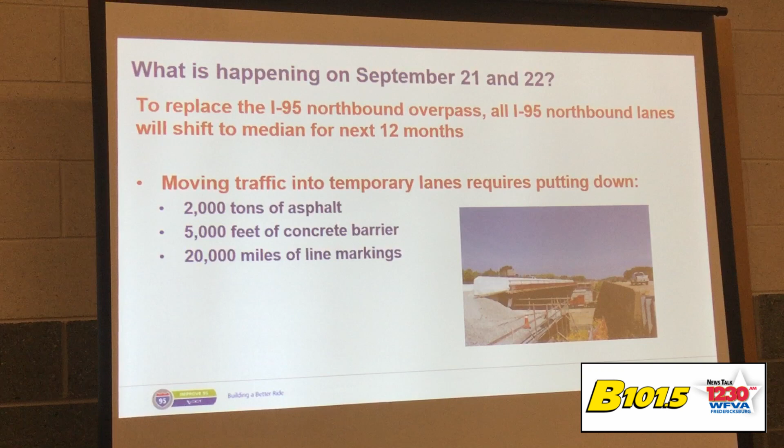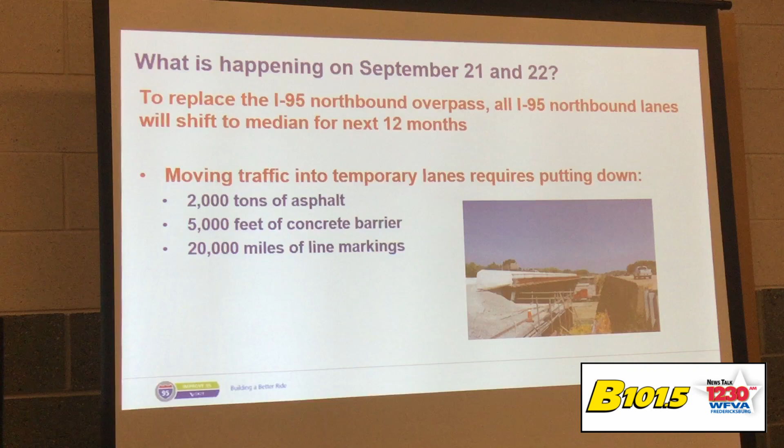So this weekend we are shifting traffic over to the new alignment. The northbound traffic on the general purpose lanes will be shifted over to the new southbound general purpose lanes bridge that we've just finished construction of. That shift is going to last for about 12 months, and it will be a full speed shift. That means we'll be diverting all 3 lanes over to the new alignment and maintaining interstate speed, which means we have a substantial amount of pavement to add. Traffic should flow through at free flow and not notice the shift. So it should be business as usual in Fredericksburg after the shift.

Essentially, we had to pick this work window over the weekend. This project, this particular shift, could have been dragged out over a month of nighttime work trying to expand these lanes. That would have required substantial asphalt work and intermittent lane closures that overall would have had an increased cumulative effect on traffic. So instead we tried to condense that into an 18-hour window with the least overall cumulative impact on traffic. We will have major impacts Saturday night and potentially early Sunday morning, but hopefully that will be short-lived and we'll be back to business as usual Sunday afternoon.

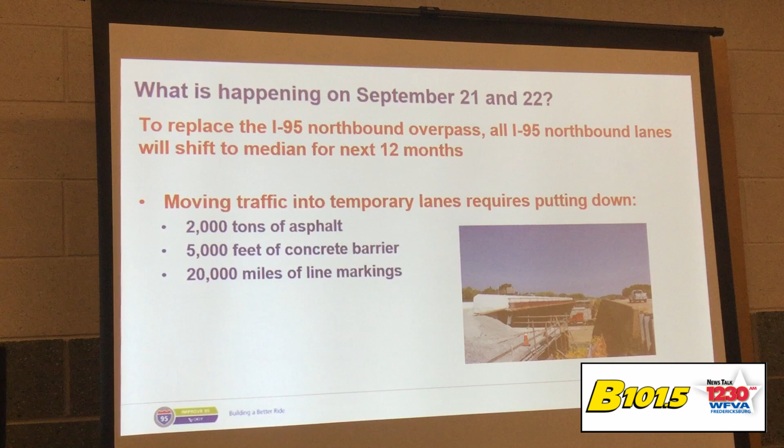All of that decision-making was driven by data, looking at traffic forecasting and modeling. We've done several models and simulations to come up with what our traffic delays should look like in the corridor, and come up with guidelines about how to handle deviations from those models as we go.

To emphasize the point, this is a profile view alongside the new alignment. You can see there's a substantial amount of asphalt. To build this shift at speed, at certain points we'll have to add almost 1.5 feet of asphalt to the existing I-95 profile.

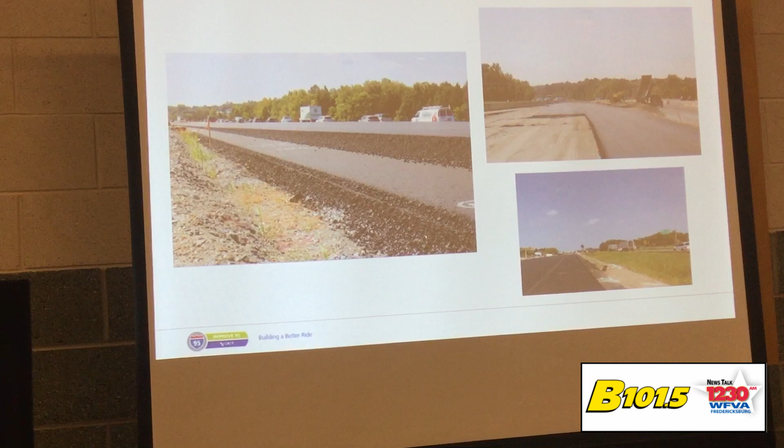That's why we have to do this closure of the through lanes and the diversion over to the exit road. Without that, we'd have to build each lane slowly, piece by piece, night by night — 2 inches, 2 inches, 2 inches, stacking that up. I joked about bringing blocks to stack up, but it would be painful, and on top of that it would pose a greater safety risk as motorcycles and other specialty vehicles faced uneven pavement for as long as a month during that buildup. Not to mention we'd almost triple to quadruple the amount of asphalt needed for that temporary condition just to maintain traffic on the corridor.

So in the end, this was a data-driven, smart decision for the Commonwealth to make sure we could extract as little pain as possible in doing this overall shift.

So hour by hour, what you can expect: at 4 p.m. we will be dropping a single lane closed — the left lane towards the median will close at 4 p.m. We don't expect substantial backups beyond what we normally see in Fredericksburg at that time.

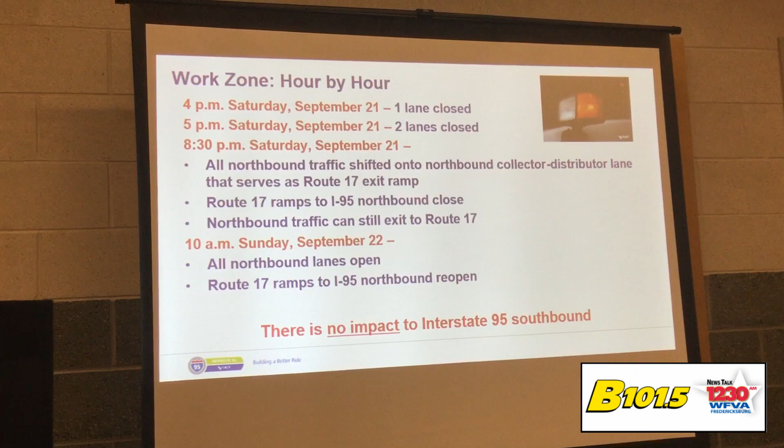At 5 p.m., things will get a little more complex as 2 lanes will be closed. When those 2 lanes are closed, we will open the exit road, what we call the collector-distributor road, at 133. Traffic will be split through on both roads, so we'll still have 2 lanes open at that point, diverting some of the through traffic over to the CD lanes. You'll want to pay attention to the split — that will be the most complex point for drivers, and they'll need to understand that if they take the exit road, they will still be on I-95 North and will still be going through. You will not have to take the exit road.

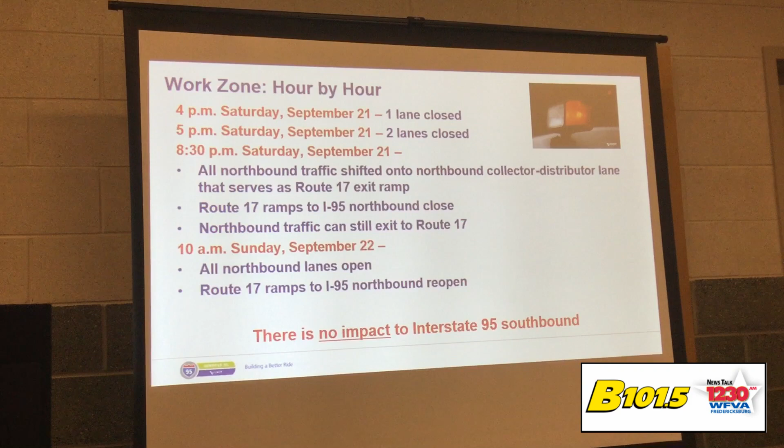At 8:30 p.m., we will close all 3 existing through lanes, and all traffic will be diverted to the exit road, the collector-distributor road. At that point, we will also institute a closure of the northbound access ramps from 17. If we start to see issues with the northbound ramps connecting to that collector-distributor road between 5 and 8:30 p.m., we may move to close the ramps earlier than 8:30, depending on travel conditions.

Once those ramps are closed, all traffic on 17 that needs to access northbound will need to proceed down to Route 1 at the Falmouth intersection and head north on Route 1 to the Centreport Parkway exit to get back to northbound. This will minimize the conflict between exiting and entering drivers on northbound and the through traffic now using the diversionary lane.

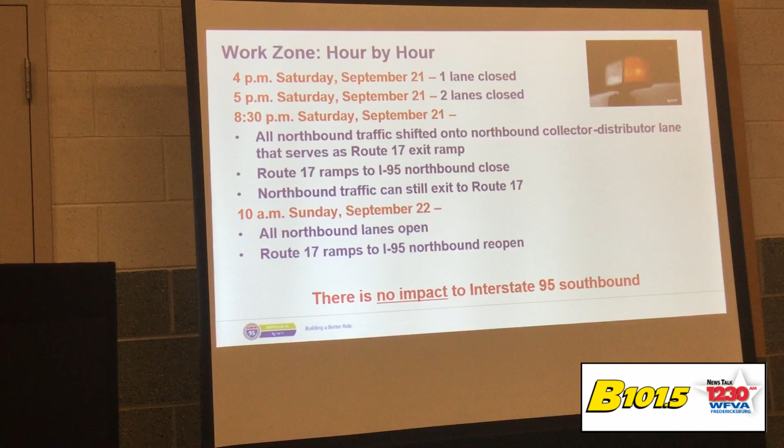At 10 a.m. on Sunday, we hope to reopen all northbound lanes, and the Route 17 ramps to I-95 northbound will also reopen at that time. We also have some contingency plans in the event that the paving moves slower than anticipated; we are working through those plans about what we'll be able to open up Sunday morning as quickly as possible. Our main drive will be to hit that 10 a.m. mark and have the travel lanes back open.

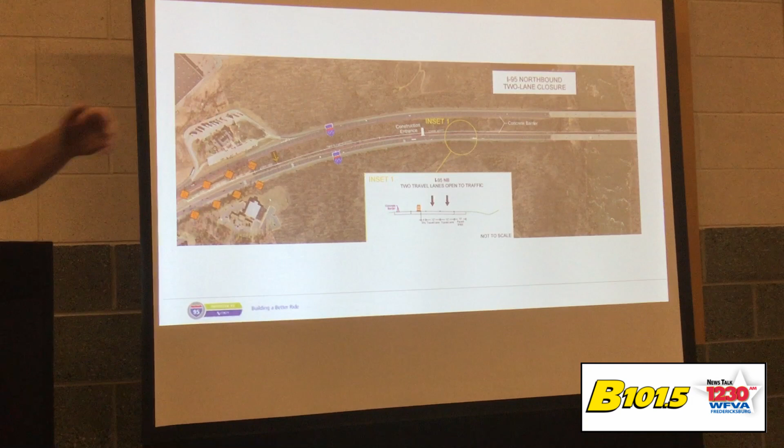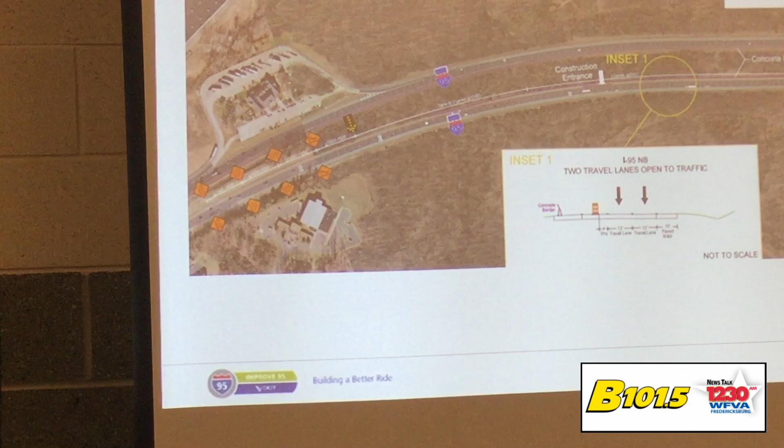On this next graphic, you'll see where we'll have advanced work zone signage. Right now we are currently here at the visitors rest area. We will have advanced work zone signage on northbound 95 across from this location. This is where our work zone will begin, and people will need to start shifting over to the right as the lane closure goes in. At this point we'd have the single and double lane closure over. People will need to be shifting to the right as they come up to exit 133.

As you approach exit 133, you'll notice the exit road over to your right and the remaining through lanes. The important part is understanding that you can take the exit road, stay in that lane, and come through and still be going through on northbound 95. This will essentially keep 2 lanes open throughout the 5 to 8:30 p.m. window. After that, all traffic will shift over.

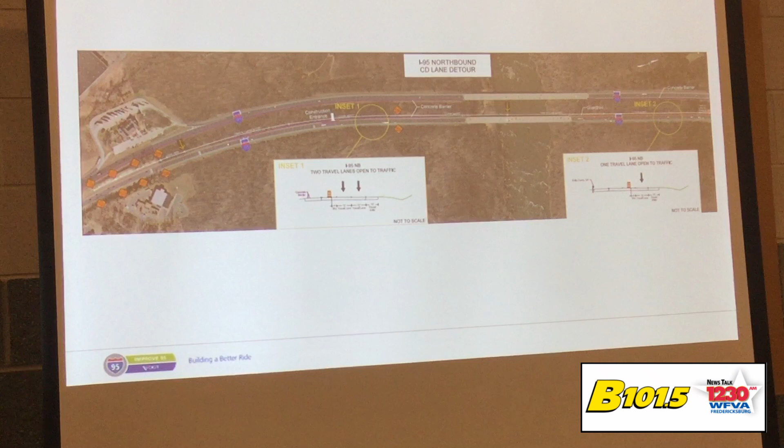All traffic will shift fully to the right-hand lane as we approach exit 133. Then once you get to exit 133, you will be diverted off to the exit road and proceed straight through and back onto I-95 northbound.

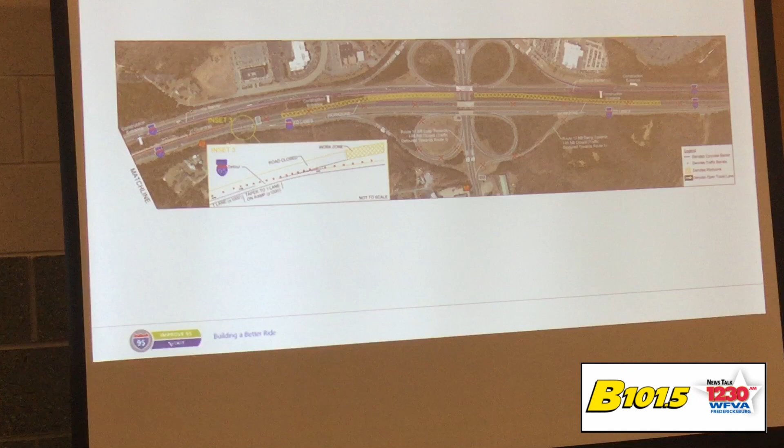Our message to travelers: the department has done extensive outreach to commuters who may be coming through or visiting the region, as well as locals. One of our primary messages has been please divert onto alternative routes, the primary one being Route 301 for through travelers going south to north. We would like you to use exit 104 if you enter the Fredericksburg district, and divert there to Route 301 to head to points north of Virginia. Otherwise, if you're further south, you can also get off at 295 onto 301 as well. Spreading that out a little will help the flow on that alternative route. We are actually working to coordinate some signals and things like that; I'll get to that in a later slide.

If you're heading to points west in the state and coming from the south, we'd advise you take I-64 or alternative routes to head west, Route 29, Route 15, I-81, any of those corridors to reach points west. I would not wait until you get to the Fredericksburg area to start that westerly direction. As soon as you can before Fredericksburg will assist us in maintaining the work zone, and will assist you in getting through the corridor.

If you do come into Fredericksburg, expect major travel delays. Backups will be anywhere as high as 3.5 to 4 miles under the existing model. That's one of our worst case scenarios. At best, you're still looking at a 1.5 mile backup as you approach the work zone, and that's the absolute best case scenario. That does not account for potential incidents and things that may occur. I can't emphasize enough to avoid Fredericksburg this Saturday evening and Sunday morning if you can do so.